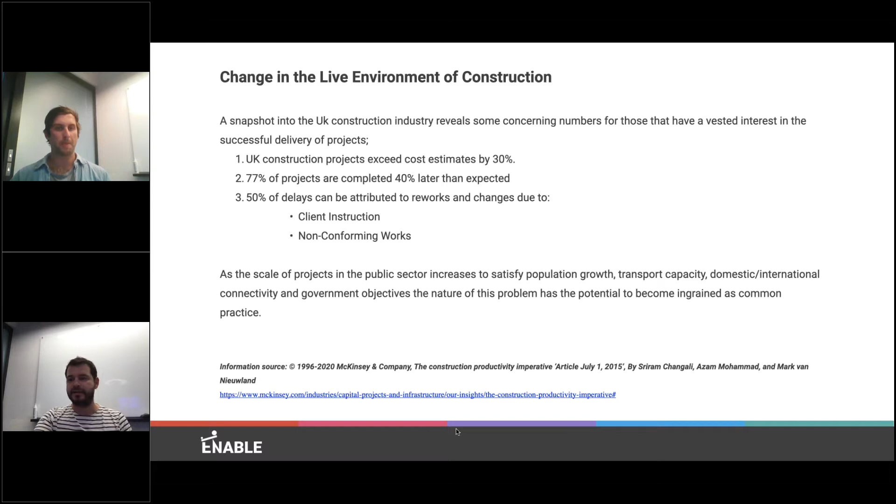So scenario one, the first scenario, is client change or client instruction that leads to change. These changes required that we found to the cable management system on the projects we were researching. This came about from two contractors working in isolation, both working on their separate designs, and then the client found that there were scope gaps between the two designs. This resulted in a workshop to identify these scope gaps and work out from the collaboration between the two design teams what change was required.

And this resulted in major changes required to the cable management system, which we will now go into in a bit more detail, because we found that there was a lot of ripple effects from this scope gap at the start of the construction. So, next slide.

So here we found this was what led us down the garden path of the effects of this change - the design drawing revision. Here we can see the design revision history for one set of drawings that include the cable management system. This is just a small snapshot, as Scott said, of one part of the project. However, it has provided us with a lot of detail and data to support and highlight problems that occur within the sector. As you can see, this set of drawings has gone through about 18 different revisions, over about a 3 year timeline.

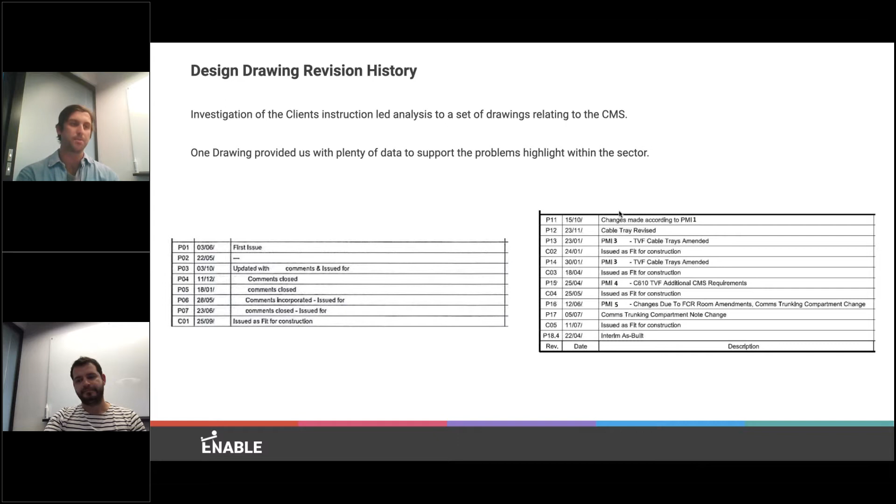So now, on the next slide, we have created a timeline of the revisions, and we've also included from our background research the project manager instruction dates. So then we can see the time from when the instruction was given to how long it took for the revisions to actually come into practice.

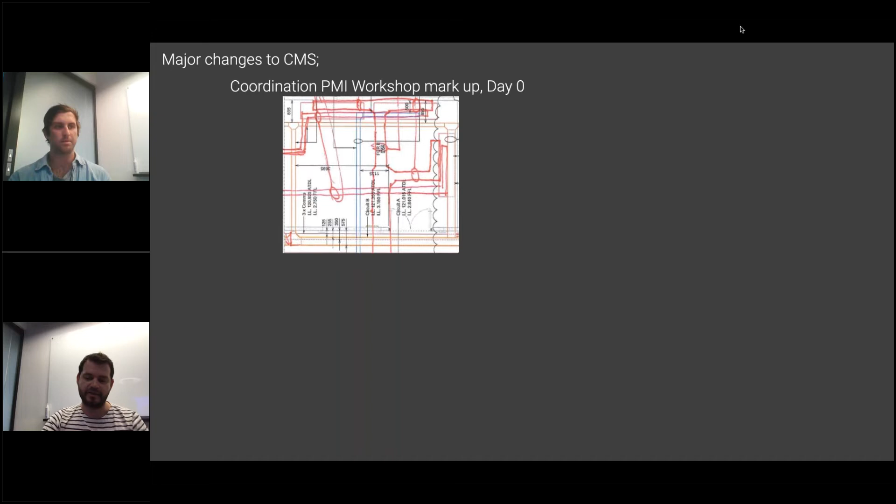So then we found some more information. From the PMI workshops, there was some markup drawings that highlighted, between one contractor and another, how the tray and services needed to be installed and laid out. So once they agreed that, this PMI then kicked off and it started a snowball effect potentially.

So a year later from this workshop, we've got a screenshot here of the coordination model. It's showing that the coordination model is being worked, and it is a good environment and it's being shared, but that markup of what the two contractors wanted hasn't made it to the design model, or the model has changed. We're not quite sure, the investigation is still ongoing.

We also found a laser scan survey from 390 days afterwards. You can also see the impact here, the representation is also slightly different. So this is 390 days after this markup. You can see some similarities, they're re-engineering potentially as they go, but the design model is not keeping up with site, or site is behind. We believe it's a collaboration of the two, and the confusing part is where the information delay is a factor for sure.

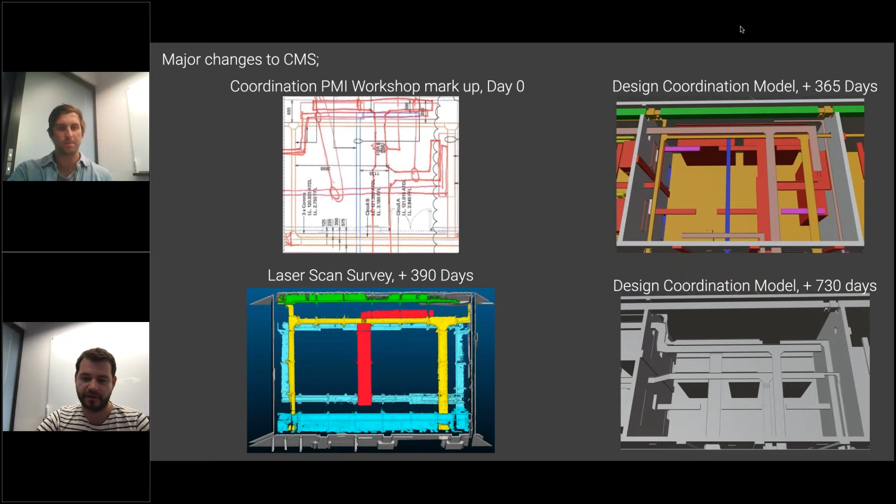So moving on to scenario 2. Scenario 2 is another change that comes from non-conforming works. NCRs, or non-conforming work, is failure to comply with the design during the construction phase. So we found a scenario on a project where the design was different to what was being built and what was constructed on site. We couldn't identify the exact cause of this non-conforming work, however we have highlighted a few potential causes here, as studied through the project data did not reveal that.

So one is, which design revision was used? Was it right at the time of construction? As was highlighted on scenario 1, there can be many revisions of the drawing, and those revisions can be issued as for construction. So if a subcontractor gets the revisions and doesn't have the latest ones, then that can lead to non-conforming work.

Poor communication downstream to appointed subcontractors can lead to non-conforming work, and also subcontractors can cut corners as they can be under a lot of pressure, and also poor supervision and presumably no quality assurance during construction. This has resulted, in our case study, in incorrect alignment of an internal wall, which is 380 mils out, which has subsequently obstructed a service supply access void from the key room above.

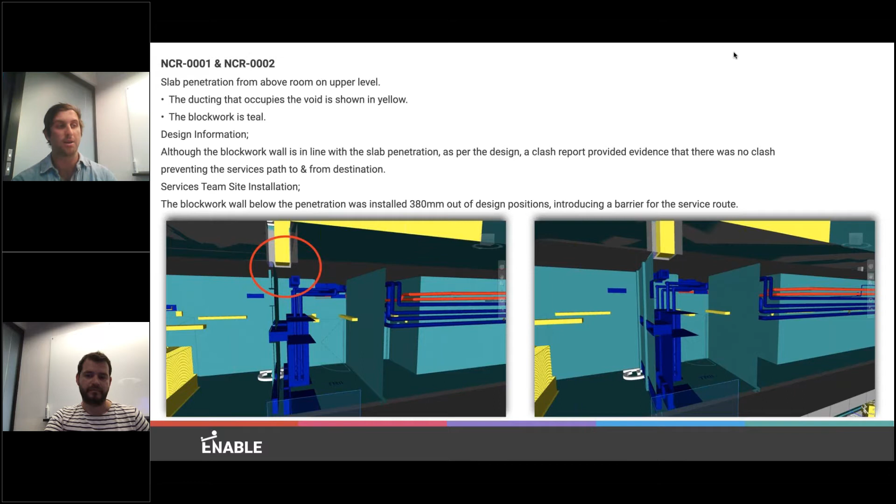Here we can see the BIM design which shows the access void from above, and this was checked and designed properly to show there was no clash. A clash detection was done, and this proved the work was in fact non-conforming as it was different to this design. The next slide shows what was actually built, and we've highlighted that the void will clash with the blockwork wall down below. The change has come about from having to fix that and go back to what was designed, which has impacted a lot of other issues we will go into.

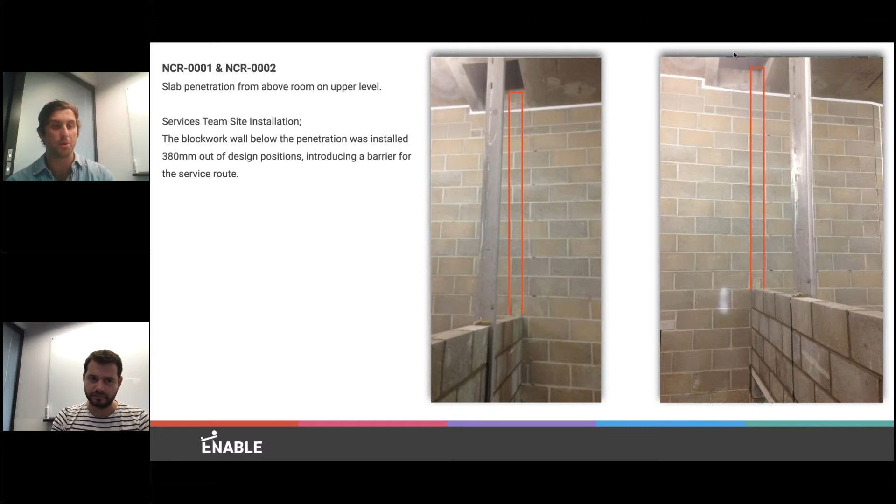So the impact review of that. We're going to look at scenario 1. There's a lot of data there that we can dive into.

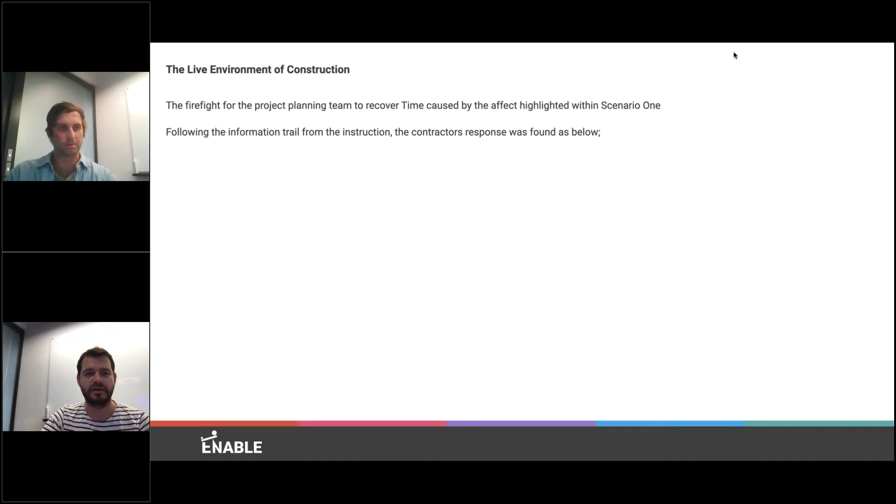The investigation led us to a recovery program plan, so on the project they've been working away to recover that. As you can see here, this is for the one PMI example, changing the CMS again. This is very manual, very labor intensive. If you're not in the industry, or potentially if you are and you're not a planner involved in their meetings, this is quite complicated to figure out where exactly we are.

You see they're trying to recover the program here, they're getting slips, and it's important to highlight that this isn't a holistic look at all the services and everything that could be impacted if there's a change such as the CMS, because it's quite an important installation. A lot of this impacts other services. There are critical path moments within these plans, and they do capture some of the other works going on in locations, but potentially not always the disciplines that should be incorporated.

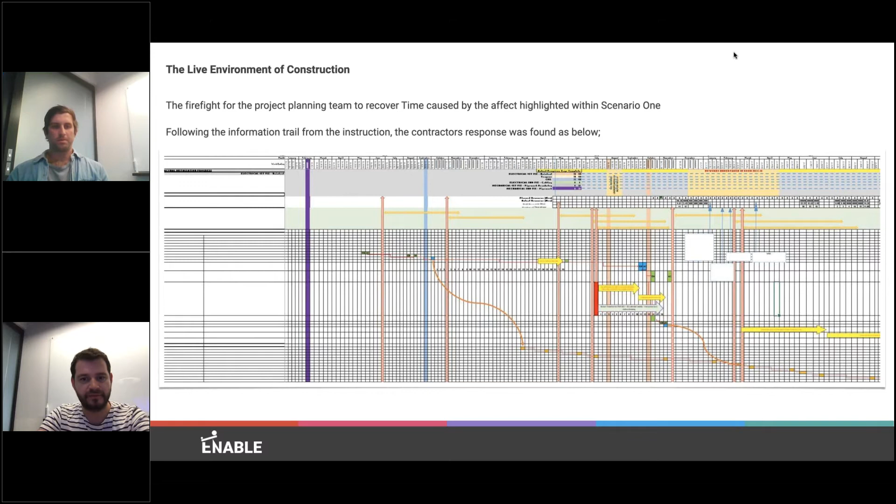If we look further into the information, we've got our CMS instruction. We can see there's obviously negative impacts to labour, to cost, and to time. Health and safety can become jeopardised if you're scrambling to get the program back in alignment. And then your client relationship can become stressed if you're not performing, or they believe you're not performing. We can also see this can impact your design specification - there's electrical calculations related to the cable traying, fire calculations, earthing calculations, and if you're punching new holes to install new services because you haven't got the room, you're going to affect the structural calculations.

This is going to lead you on to a bad handover testing commissioning program. But as we're investigating this, we could also see the power and benefit of some of our solutions and the work we do in the industry at the moment.

We do a lot of asset information database and inventories, so we could look at our data and see the relationships between CMS. We could see the relationship between those services, the cabling. It has source and information, and it has a lot of impact and effect upon all the subsequent end devices and assets.

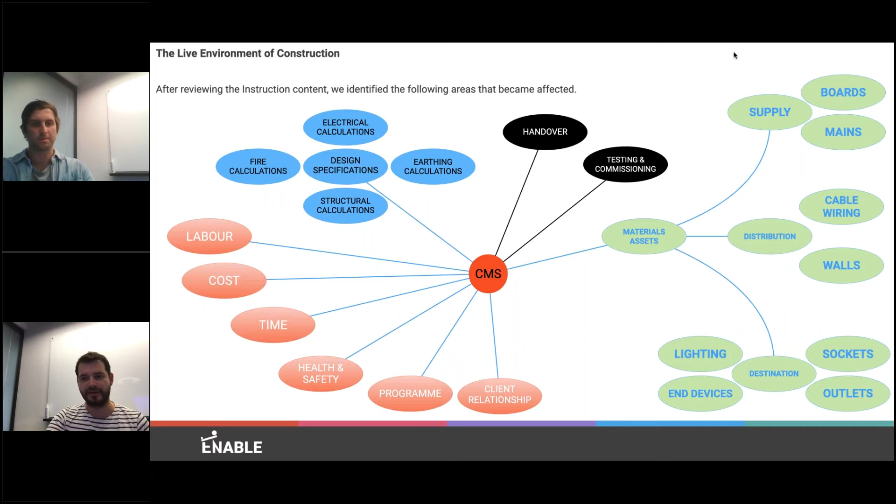With a relational based database, you can investigate this a bit further, a bit deeper, and start to apply some of them back to the program with potential solutions coming up, which is where we come to now. So we're going to continue with the solution. There's some that we're currently invested in, some that are delivering, some that are delivered, and some that are proof of concepts we're working on with other partners.

Our first innovation - we have built our own hardware, digital Lidar. The purpose, or reasoning why, was we can control that connection from the data capture to the software architecture. So we can build it in a way that satisfies our pipeline solutions. We can manipulate that data in a way that best works for us if we have control of the hardware and the technology inside of that.

That kind of stemmed from one of the beginning projects of Enable My Team, which was within the Crossrail scheme. There was a project to install all the fit-out services for the tunnels. I was involved in the capture, but more importantly, the recognition of those panels that make up the tunnel rings, and where to drill automatically to then fix the CMS within the tunnel.

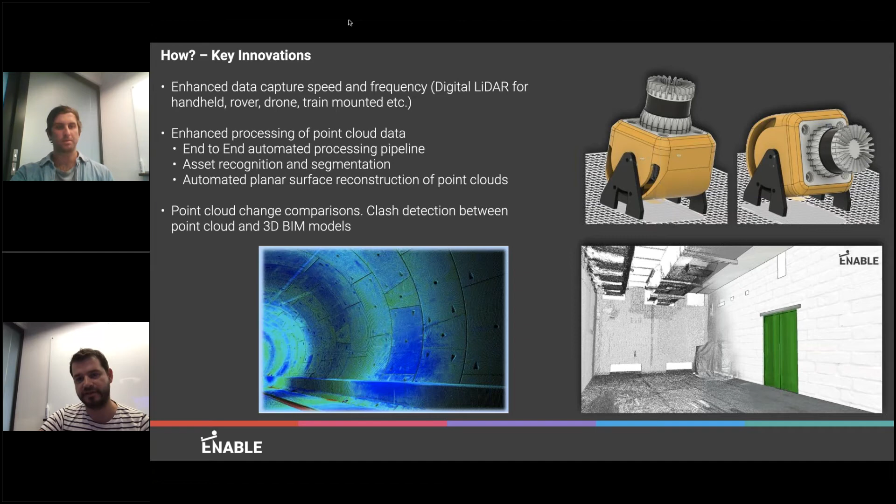So these solutions are cloud-based, and there's no software or hard drives or any hardware to install.

We can also, as you can see from the images, do our detection, and we can look for any clashes, and we can separate key features within the rail environment.

And then we have another subsection of this, the 3D model viewer, so we can integrate with CDEs and EDMSs to stream assets in. Obviously, API calls, etc. I'm not a software specialist, I'm an engineer, but keeping a beat on it, it's definitely the way the industry, and especially ourselves, are going.

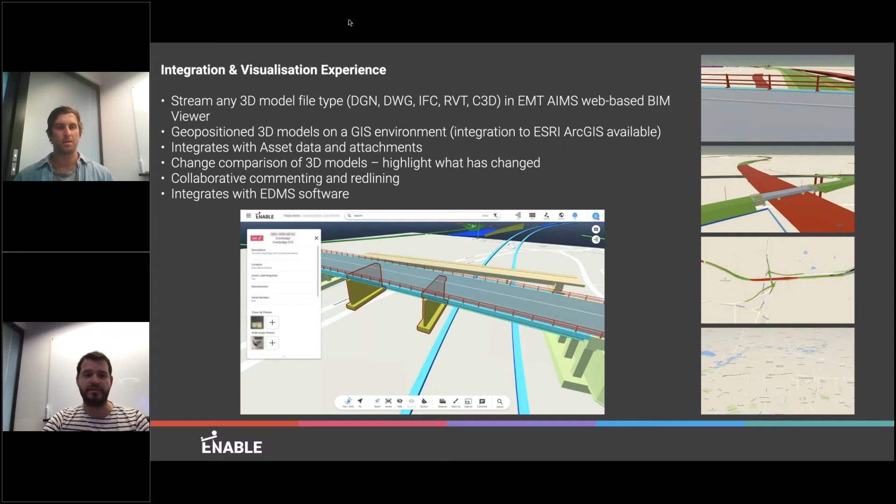We have also pulled information, as I was saying, from the EDMS, so we're starting to join the dots and bring everything together. So we've got Atlas, we've got the AIM system, we've got the 3D model viewer, and we've got all the integrations, which leads us on nicely to our solution for scenario 1.

For the digital Lidar, after day 0, where the construction revision C1 drawings were issued, the digital Lidar can be harnessed and put into practice. So the faster digital capture utilizing advances in scanning applications can be used. This means we can capture field site progress during regular reviews, inspection as construction progresses.

This means that digital processing pipelines can be automated, turning the raw data into customized outputs, and this can achieve multiple things, including improved awareness of the live site environment as construction progresses, can improve decision making during change estimation, which will reduce impact to change, desktop drawing surveys, and reduces volume and impact of non-conforming work.